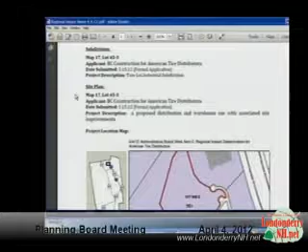The first, and we'll combine them because the first subdivision application for BC Construction American Tire Distributors is associated with the site plan for BC Construction for American Tire Distributors. The bottom line is that staff recommends the project is not a development of regional impact. It doesn't meet any of the criteria established by the Southern New Hampshire Planning Commission.

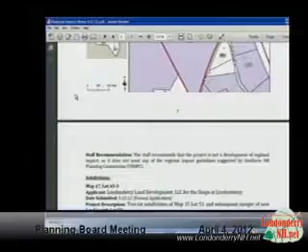Can you tell me, Cynthia, if any of these are found to have regional impact? The second one, for the Shops at Londonderry, was actually addressed on the July 13th agenda. The third one is the change of a sign from one side of the lot to the other. Even though they're moving forward to a different date, we can find it does not have a regional impact.

Could we take them all at the same time? I would entertain a motion. Madam Chairman, I make a motion that we find the 3 in the letter from Cynthia dated April 4th, 2012 — BC Construction, Londonderry Land Development, and Elliot Health System Phase 4 and 5 — are not of regional impact. Second.

Any discussion? All those in favor? Aye. Opposed? Abstentions? Chair votes affirmative.

Election of officers. So I'm told we can railroad Art right back into the chair position. I would entertain a motion to, unless anybody wants to change, keep the same slate. I'll second that. So it was motioned by Rick and seconded by Dana.

Any discussion? All those in favor? Aye. Opposed? Chair votes affirmative. So we're still in office. Wouldn't it be nice if all elections were that fast and easy?

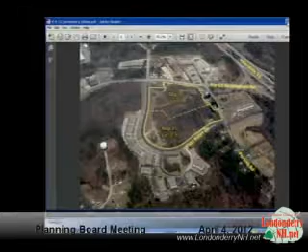I'll go through. Chris? So the image we've got up there right now is the subdivision that you're proposing. What's the current state of affairs? Do we have an image of that, Cynthia? We do.

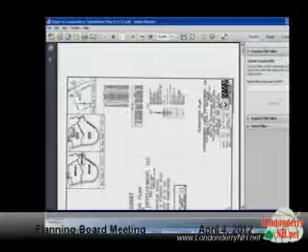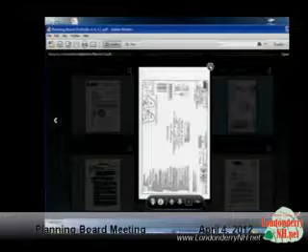Cynthia, if you have that PDF I sent you over this morning, it's all condensed onto one sheet, might be easier to read. I don't know which sheet it was, Brad. If she pulls up the thumbnail, I'll be able to point right to it. I think I just saw it go by. Yeah, the one in the middle, top, right there, yep. There we go.

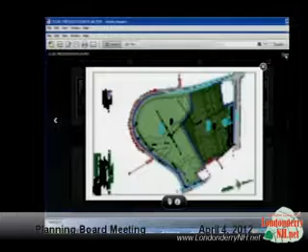If you can rotate it clockwise 90 degrees, counterclockwise 90, it'll be in the same configuration we just looked at. I'd like to, but okay, we can talk about it in this. Not on this computer, I can't. Okay, that's fine.

That's the existing lots now, Brad? The two big green parcels are the existing lot, and over on the right-hand side, which is Route 28, you see a small little green rectangle. That is the separate lot. So basically, you have two existing lots, that little tiny one, and then the rest of the parcels. So one lot is this little one here, and then the remainder of everything in green is the parcel. So the remainder is the other parcel, and you're merging that small green area into it and then subdividing down the center. Correct. Okay.

Just a question, looking at the plan in the next piece that we're talking about, jumping ahead, it sure looks like that's straddling the two lots. Say that again? The design, the plan you're going to propose afterwards, looks like that's straddling the two proposed lots, okay? Absolutely does. That's correct. It was strategically located along the main entrance.

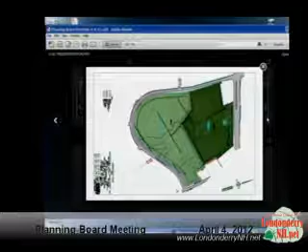Just questioning why? What was the rationale behind doing that division that way? Couple different reasons. One had to do with some of your local regulations as far as site plan, that we can talk to in the next article. And then there were some financing issues that made it easier on that side. Okay, but right now it's currently all one lot, correct? Okay, correct.

All right, I'm all set. Same here. You're always set. Dana? No? Sorry.

Is this the appropriate time to bring up something? I see something else in our packet here from Deb Lievens from the Conservation Commission. Does that apply to this one? That's not appropriate at this time, it's part of the next site plan. Okay, because my question would relate to that.

All right, I have nothing about this. John, you talked about drainage, yep, and how we're not sure how drainage is actually going to be affected in this particular instance. Well, we've had numerous discussions, John, and again, we've got a good handle on what's going to happen.

But again, in order for us to make sure that it's cast in stone, we elaborate on the comment. That way, again, we don't lose that comment. And again, because it's always a work in progress. Conceptually, I've agreed with how Brad is going to handle the stormwater out there. But again, until everything is cast in stone, there's no reason for him to finalize all those easements and everything. And if things move around, it's kind of a waste of time.

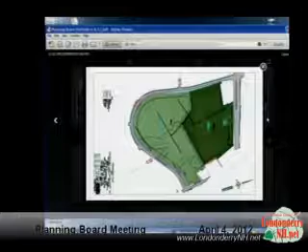We're going to get into the nitty-gritty of what they're going to be building in a little while. But in order for them to do the development, they need to subdivide this lot, consolidate and re-subdivide. So unless somebody has a question on the subdivision - does anyone have a question on the subdivision?

Okay, then my question is standing water down in Perkins Road, and 3/4 of the year there's water there. Is that being considered as part of the water plan? You've talked about the sewer, the stormwater drainage and all that. Above and beyond that, the standing water that goes from several hundred yards up Perkins Road, right underneath Vista Ridge, and down toward 28.

That is water in wetlands 10 months out of the year. Has that been considered? Yeah, you'll see that as part of the site development. They're not impacting that wetland, the drainage coming from the south that goes beneath Vista Ridge - they're not playing with that.

Sir, could you tell us your name? Yeah, Bill Sibley, S-I-B-L-E-Y, from Vista Ridge.

Thank you. Okay, so I'll entertain a motion, bring it back to the board. Madam Chairman, I make a motion that we conditionally approve the plans for the subdivision. Second. Any further discussion? All those in favor? Aye. Opposed? Chair votes affirmative. Okay, so the subdivision is conditionally approved.

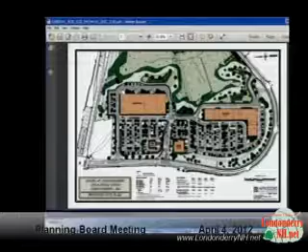John pointed out that stormwater drainage has been a big issue with this particular site, and it's been looked at extensively—I think we're up to 4 or 5 different engineers reviewing it. The site will be contained in a closed stormwater system, discharged towards the rear of the buildings. We have 3 different areas mitigating runoff: 2 stormwater ponds, one here and one over here, as well as a third area, which is a rain garden in the middle.

It was pointed out, correctly, that the existing Vista Ridge condominium complex on the west side of Vista Ridge all discharges right through this site via some existing riprap swales, which was all approved as part of that development. Since we'll be building on top of those existing swales, we needed to accommodate that stormwater flow, which picks up a lot of Vista Ridge as well as the condo development. We're proposing to pick that up in a closed drainage system, bringing it around to the rear of the site and discharging to the larger wetland out in the rear.

As part of our drainage design, we have worked with John's office, Stantec, NHDOT, and NHDES, all reviewing drainage as part of the project.

We have proposed quite a bit of landscaping, although at the scale you see on the drawing, it's fairly difficult to make out the individual trees and plantings. We've planted extensively on both Vista Ridge, interior to the parking lot, and on the rear to screen, as we've had many discussions locally and with town staff as well.

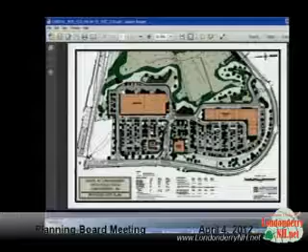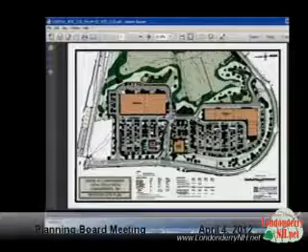There will be 2 dam permits being applied for and pending: one for one of our stormwater ponds out back, and one for the existing wetland out back, which has an existing berm that was built as part of the Vista Ridge project. We'll need a permit for that as well. With that, Giles, if you want to speak quickly to the off-site improvements, he can give you an idea what's going on at Vista Ridge.

Good evening, for the record, Giles Ham with Vanasse & Associates. We've actually been working on this project for about 1.5 years now. I've had several meetings with town staff and the state in reviewing this project. Route 28 itself has been under improvements, with interchange improvements as well, and has adequate capacity to accommodate this project. So we've really just focused our effort on Vista Ridge Road in this area to upgrade and widen it to accommodate the traffic affiliated with this project.

In this area here, there's about a 75-foot right turn lane today coming down the northbound direction on Vista Ridge Road. We're going to widen that out to about 250 feet, where there'll be 2 lanes to come down the hill to accommodate existing traffic as well as traffic from this project. Coming into the site, there's an exclusive left turn lane designed to accommodate turning traffic, in addition to the through lane. So we're basically widening about 1,000 feet of the roadway in this area.

It's been reviewed extensively by your consultant and the state, and the state's approved these changes, as well as your consultant. As far as the permit we need from the state, it's kind of unique in that this is actually a driveway permit, so while the state's approved it, the town actually has to file for the driveway permit modification for this project. In a nutshell, that's really it. These roadway improvements will accommodate the project and have been approved by both the state, your consultant, and staff.

Trucks are going to come in that way. I see people all the time making that cut through from Perkins Road to avoid that traffic, and the trucks are going to do the same thing. They're going to come in that back way because it's the most direct route to get to those stores, and the stores aren't going to want the trucks out front.

So as much as you can say well we're not going to do that, or they're going to use the main road, or it's going to be more convenient for them to come up that way - it's going to be a hazard for every single one of us that is trying to avoid coming by the stores and going out the way we've been going currently. It's going to make a problem for all of those people as well.

Can I just interrupt you for one second? John, when Hannaford came in, didn't they make a rule that they couldn't accept anybody coming down Gilcreast Road, that everybody had to come down that other road closer to the back of Hannaford? I'd have to look into it, Mary, it doesn't... but as far as the trucks?

No? Well, I do know that most of them come in off of Gilcreast. Really? Okay, all right, because that's a straight shot in. Mary?

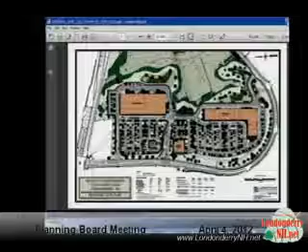We don't need it. That road in the back - why aren't we widening it then? Like we're widening that road to bring traffic in, there should be two-way traffic back there if that road is going to sit there.

Yeah, I have a question for you. I can imagine that trying to bring a truck in through from Perkins and making that turn from Perkins onto Vista would be hell. And one more thing, I drive a straight job, I don't drive an 18-wheeler, and it's tough getting a straight job in there. That's no trailer, that's what I was gonna say - I drive a gas truck.

So what you're saying is that most likely, given that back entrance existence, trucks would come in along 28 onto Vista Ridge and do the loop around. Yeah.

And this is how you come in right here, at the top button. See how you come in there? I would drive in, and you know what, there's a lot of traffic. I'm going right over that curb, I'm going to eat up all that lawn, I'm going to break all that sidewalk. That's what happens - at 3 o'clock in the morning, nobody's around, nobody cares.

And then the town's going to say, why is this broke? We're putting a lot of money into Vista Ridge. Why does this street keep breaking? Because at 3 and 4 in the morning, when we're making deliveries, nobody's up. It's my word against yours that my neighbor saw me drive on that sidewalk. No, I didn't, the plow did that.

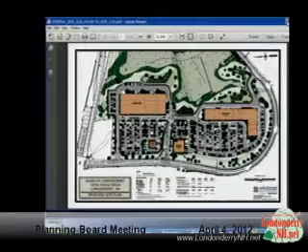I know, we hear it all. That road is a joke. It doesn't need to be there if it doesn't serve a purpose. It's an accident waiting to happen. Does that road have to be there for any kind of emergency vehicle? Have to look into it.

The only thing I can think of is the fire department. Yeah, the other option we could do is make Vista Ridge a gated community. Put two automatic gates on each end. Then you don't have to worry about vehicles going one way or another. The kids can be picked up at the end of the road on both sides. And these fine gentlemen can pay to have it installed and supply automatic remotes to let us get in and out.

It's done in California, it's done in Londonderry. Andre, did you have something you wanted to say?

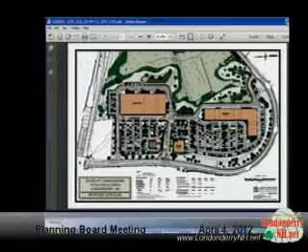I just want to address part of this. I think part of the reason is that the fire department - if I could finish - part of the reason why the fire department wants 360-degree access to this facility is they require to have this back here, and you'll find that through all the developments in Londonderry.

So is it possible to make that a gate? How about a gate with a lock? Is it emergency? The fire department has the key, just like they have a key to get into our units? No, they're trying to get away from doing that. That's why you see a lot of Opticom systems, so if there's an emergency, they can hit a button and the gate goes up, as opposed to trying to go out and fiddle with it.

I understand what you're going to say, I just don't want you to debate - no, that's not what they want. What I'm saying is, like this gentleman said, the first kid that gets hit there, how much did that save? You asked a question regarding why is that road back there, and I just wanted to give you an answer. Part of the reason why that road's back there is for our fire access.

Okay, thank you sir, I just wanted to let the applicant respond. Actually, I wanted to compliment what Andre said. The fire chief wanted that access, they want to fight the fire from both sides. And they don't want to have to, in the middle of the day, fight any traffic. So they want clear access.

But wouldn't it be possible to put an emergency gate there? They don't want an emergency gate, they want to be able to get in when they can. You could take it up with the fire chief. But I don't think it's safe - if they want to get in, and for some reason nobody has the key or whatever, they want clear access to fight a fire on a shopping center. So they wanted access from the rear and from the front.

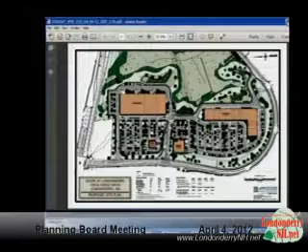Is there any access to that part of the building in this corner, the L-shape there? Why can't you make access to go around the building that way from that entrance, so the firefighters can fight the fire 360 degrees around that building, come down this corner?

Bring in your grade a little more. You're cutting the grade anyways. Make it so you can get a truck around the back of that building.

Why don't we take it as a genuine concern of all the residents of Vista Ridge and ask the planning board to take it up with the highway department, the fire department, and the police department, and find the best way to work that road.

And they are going to have to blast there. Who's gonna pay for all the damage at Vista Ridge when they start blasting on that hill? That's all ledge. That's another concern.

That's all ledge back there on this side. They've gotten some preliminary geological surveys, right? And you have not determined whether or not you're going to be blasting, is that correct?

If it has to be blasted, the typical process is you do a survey. You hire a company, they survey all the surrounding areas within a certain geographic area around where you're blasting. They do a video survey to determine what has been damaged, if anything, so they have a benchmark to determine if there's any further damage. In any blasting operation around the state, that's typical.

And that would be provided here, and I'm sure Mr. Trotti would want us to do that, and I'm sure this board would want you to do it as well. That's typical, there's no surprises there.

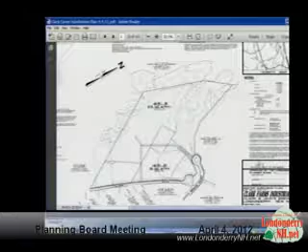It has approximately 1,700 feet of frontage on Clark Road and about 525 feet of frontage on Jacks Bridge Road. Those roads intersect, but Clark Road is gated so that there is no access from Jacks Bridge Road to Clark Road or vice versa, to segregate the industrial and residential uses out there.

That's an Opticom actuated gate over there as well. Really? So it's very easy for them to get in and out of, right? It just goes up when the fire truck comes by? Press the button, correct. Okay.

Sorry. The site is predominantly wooded. There is an old horse track in the front of the site in the vicinity of the proposed lot 45-5. There are some wetlands in the northwesterly corner and along the southerly boundary, which have been flagged in the field by Bruce Gilday from BAG Land Consultants, and located by our field crew, and that's all shown on our plans.

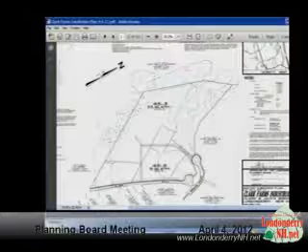The plan proposes a couple things. One, we're subdividing off and dedicating about 0.46 acres right adjacent to Jacksbridge Road. The purpose of that is that area currently is under easement. There's an existing public stormwater basin there and some sight distance easements, and the applicant's preference was for those public easements to really just be incorporated into the right-of-way. So that's one purpose of the plan.

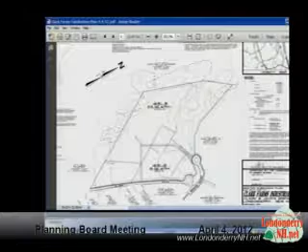And then the major purpose of the plan is to subdivide the remainder of the lot into two lots: new lot 45-3, which is about 33.8 acres, and new lot 45-5, which is about 8.8 acres, and is the site for the next application on the agenda. The property has municipal water, sanitary sewer, natural gas, and power and communications, all on Jacksbridge Road to service the property.

There are, associated with the plan, in support of the site plan, two easements proposed. There's a cross-access easement off the cul-de-sac at Jacksbridge Road, which will serve not only lot 45-5, but in the future will serve access for lot 45-3 and any potential future subdivision of that lot. There is also, off the southwesterly corner of lot 45-5, a 30-foot wide drain easement shown on our plan for the outfall of their drainage system onto the lot.

The landowner has granted that easement for them. And as a housekeeping item, we are also adding a 20-foot drain easement on Clark Road, where there is an existing drain outfall from the public drainage system. It probably should have been in place prior, so that's something we're adding to the plan now.

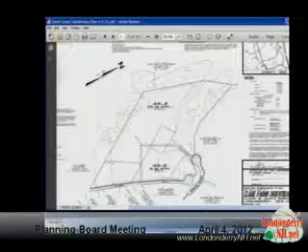That's kind of a housekeeping item the town requested. And as was mentioned, we are requesting 7 waivers, 3 of which were checklist items, which Cynthia will go over. John will go over them. Okay, that's pretty much the long and short of the plan. I'd be happy to answer any questions the board or anyone in the audience has.

Madam Chairman, members of the board, I'll go through the additional waiver requests. The applicant is requesting a waiver to section 4.01C of the regulations requiring the plan scale to be 1 inch equals 100 feet, where the plan is presented at 1 inch equals 150-foot scale for the master subdivision plan set. Staff recommends granting the waiver because the subsequent sheet shows boundary and topographic information at 1 inch equals 40 feet, and the master subdivision plan sheet is intended to depict the entire proposal.

The second waiver is to section 3.02C of the regulations to place conservation overlay district signs. Staff recommends granting the waiver because the lot to be developed per the associated site plan application is outside the conservation overlay district, and further development of lot 45-3 will require placement of the COD signs.

Thirdly, the applicant has requested a waiver to section 3.09F of the regulations requiring driveway locations and sight distance plans for the proposed subdivision. Staff recommends granting the waiver because there is no development proposed for lot 45-3, and the driveway design and sight distance plan was provided as part of the site plan application for the new lot.

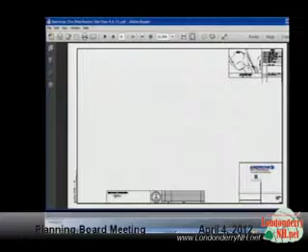The plan in front of you, as mentioned, is American Tire. We're asking for site plan approval tonight. Can we get to sheet, probably sheet 3, maybe? That'd probably be the easiest.

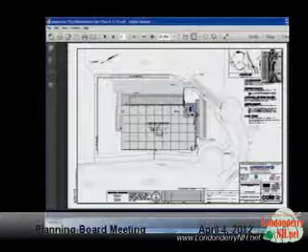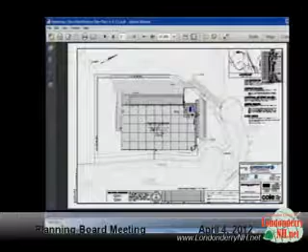The site itself, as previously described by Mr. Blatchford, is roughly 8.8 acres. Again, access for the site off of Jacksbridge Road. To frame the location in the area, we're immediately across the street from the Penske development, and Harvey Industries shares cul-de-sac access with us off the end of Jacksbridge Road.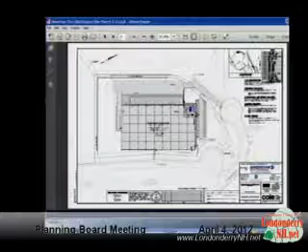The site itself slopes from Clark Road to, I'm going to call it, the north and west, north being to the upper right-hand angle of the sheet. The plan itself requests a building of about 125,000 square feet exactly: 120,575 square feet of warehouse, 4,485 square feet of office. The intent or use of this building will be for distribution of tires of all types, typically distributed to local retailers.

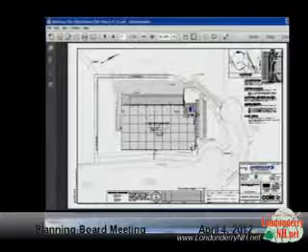The plan itself, as was mentioned, all access to this site will come off of Jacksbridge Road. Previously, the town is committed to Clark Road being limited access, or zero access, for the industrial area.

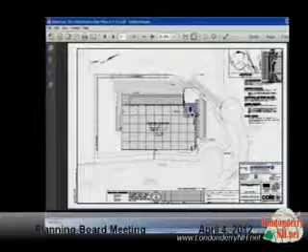The Zoning Board of Adjustment previously granted us, on February the 15th, a variance to allow our access road to not be on our property. That's listed in the plan; that area is shown right here. The purpose was to allow for a road that could be extended in the future for the benefit of the remainder of the mother parcel.

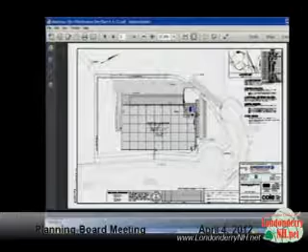As is also listed in there, we are asking for a conditional use for a reduction in parking. I believe that's part of what Cynthia will address as she gets to some of her comments.

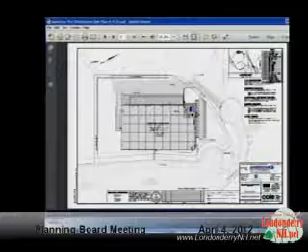The drainage itself — the entire site is proposed to be self-contained for stormwater quality and for stormwater management, both quantity and quality. We already have an AOT permit approved by the state, and I believe we're down to some of the final minutia comments back and forth with staff on that. So both the drainage report as well as the plans have gone through a couple of rounds of review.

The site itself — utilities all exist to the site. We have received utility letters from all of the existing utilities. Water is proposed to tap to an existing tap that was put in place off of Jacksbridge Road. So is sanitary sewer, electric, gas, and telephone — all have services to the site. So we've already coordinated with them for the access to the site.

The landscaping — if we could flip to that quickly, I believe that's going to be sheet 17, Cynthia.

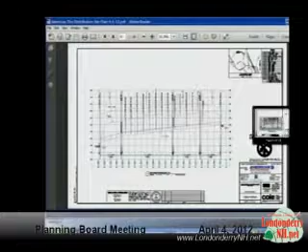We'll blame this on the PDFs, too. Sure, excuse - they're horrible.

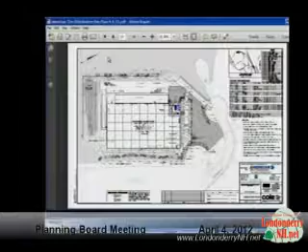The landscape plan is shown currently. This area off the end of Jacksbridge Road shows landscaping, adjacent to the parking lot, and across the swale or drainage area from the loading dock. Those are all internal or across from existing industrial zoned areas.

As you're probably aware, on the opposite side of Clark Road from our development are at least three existing residences. Although it's master planned and zoned to be industrial in the future, there are existing residences. We reached out to all three of those residents, sending certified mail directly from me. We heard back from one, and I believe you have some of that correspondence that was submitted to you.

It was our intent to work as closely as we could with those people to be as sensitive as possible. Part of what we did was introduce alternating landscaping and complementary fencing across from the residences where we could gain the maximum benefit for them. Our intent is to reuse and save as much of the buffer along Clark Road as possible. We hope you're comfortable with that outreach.

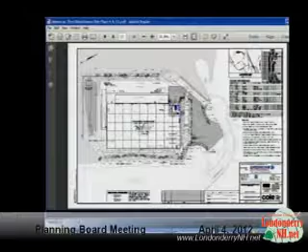I've been doing this for 20-plus years, and our group works together in design-build scenarios across the country, and there are few places we've worked with as proactive and professional staff as you have in Londonderry. You should rest assured the citizens of this town are very well protected by a very professional staff. It's very encouraging. That is not the case everywhere we go, so I don't say this every time.

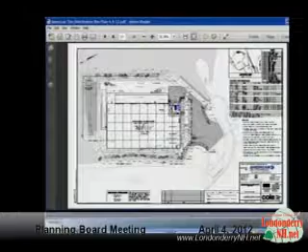As I mentioned, we have received the DES AOT permit. We've been to Conservation Commission and received a favorable response from them. Heritage Commission, we were in front of them two weeks ago and received a favorable recommendation dealing with some existing stone walls that we're going to stack and reuse within the site. There were some questions on the signage - that part of the plan will be handled separately.

Regarding utility letters, we are into the New Hampshire DOT and have gotten a letter into them. This particular site was not part of the original Phase 1 of this subdivision. Phase 1, for Jack's Bridge or the Evans family subdivision, allowed for a certain amount of traffic to occur. Although we're not in that existing Phase 1, we fall within that. The traffic letter was submitted to DOT and they concur with that. There are some cleanup items we've been made aware of as of 4:30 today, dealing with some commitments between the land seller and DOT.

We believe that to be the only outstanding issue, and our traffic engineer's initial responses from DOT were that they felt comfortable with that. So that's basically the presentation I have. Happy to answer any questions. Members of the Design Build Construction team are here to answer any questions if you have any.

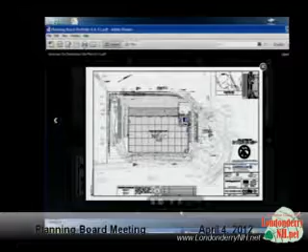Did you want to see the building? Oh, I neglected the building - it's tilt-up concrete construction, if you'll flip to the elevation in the last few pages. Our architect, Mark Hugebeck, sitting here, would cringe if I didn't mention how beautiful the building was. This is, I guess, a prototype building. We've built a similar building in roughly 8 to 10 places across the country right now, coming out of the ground, and received fairly favorable responses. It is a warehouse distribution center. We try not to take that lightly, and I think you'll find the treatments to it to be at least in keeping with or better than what you're seeing around town currently.

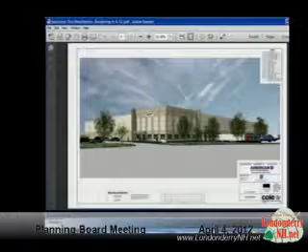Cynthia, I know it's your turn next, but I just want to compliment you and welcome you to Londonderry, and compliment you on your presentation, and thank you very much for your patience. Thank you. Okay, thank you.

There are three waivers. As stated earlier, the applicant requests a waiver to Section 311G3, requiring one deciduous tree for every 15 parking spaces. The parking lot is relatively small. There is perimeter parking and perimeter trees, as Mr. Riggs pointed out earlier, along the edge that would be facing the public right-of-way.

And the lower end of that lot is set aside for snow storage, so staff supports granting the waiver.

The second one again addresses landscaping, requiring 10% of that area. They don't quite meet the 10%, it's something slightly less than, but for the same reasons, it's small enough that the perimeter landscaping does the same as if you had one additional island in there in terms of mitigating the heat effect in that location.

The third is a waiver request to section 3.08B3 requiring 200 feet of separation from an existing driveway on the same side of the roadway. Staff supports granting that waiver because the proposed point of access is situated in a manner to potentially accommodate the future extension of Jack's Bridge Road.

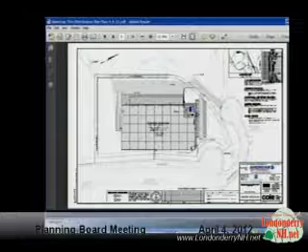That extension that was going to get you into your property, is that now a public extension of Jack's Bridge Road? Or, because it wasn't on their property, so who owns that? I've just never seen that before, I'm curious. It's an access easement from the Evans family, it's on Charlie Evans' property. We have an easement to use that to perpetually access our property. All right, I see. The concept is at some point in the future this could extend, and that's already set up to become public at that particular point. Okay, thanks very much.

I read your correspondence with one of our residents, and I applaud both yours and our staff's efforts to be proactive in not only satisfying his questions, but also coming up with solutions that clearly made him happy. So we thank you for that. In full disclosure, I was city council president in a previous life in the town I live in, so I've dealt with the challenges you all face, so I appreciate the comment.

I think it's a win-win when you can work well with your neighbors, and even the applications we heard before, I think it's really important. So yeah, I agree that that's great. And I also appreciate that you thought about extra parking if that was to be a problem. Not too many people have a solution before we ask that question, so thank you for that too.